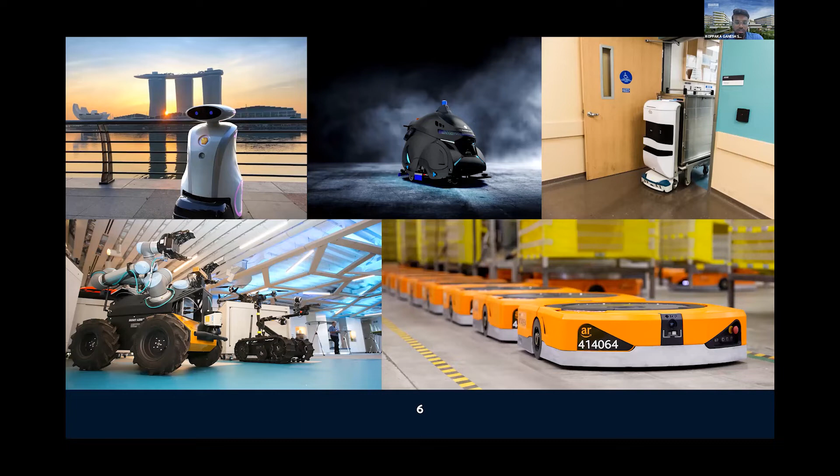When everyone started to face the heat of lockdown, robots came into play. They kept people safe, the first responders safe, and adoption of these robots really opened up doors in terms of research and applications, among others. So here are some of the robots you might have actually seen in the commercial market. The robotic community spans across multiple domains - be it cleaning, maintenance, logistics, surveillance, etc. There is huge potential coming up.

Many big multinational companies or even small startups all embrace robotics as a final end solution. The good thing is that all the robotic solutions coming up are being embraced as potential scalable commercial solutions. As part of this, we have a few projects I was involved in - the first is Project Ermine. As part of this project, we developed several robots - this is the fundamental research we were doing here. We anchored our research onto several platforms, and these platforms helped us innovate even more things. I'll quickly take you through some of the platforms we have today.

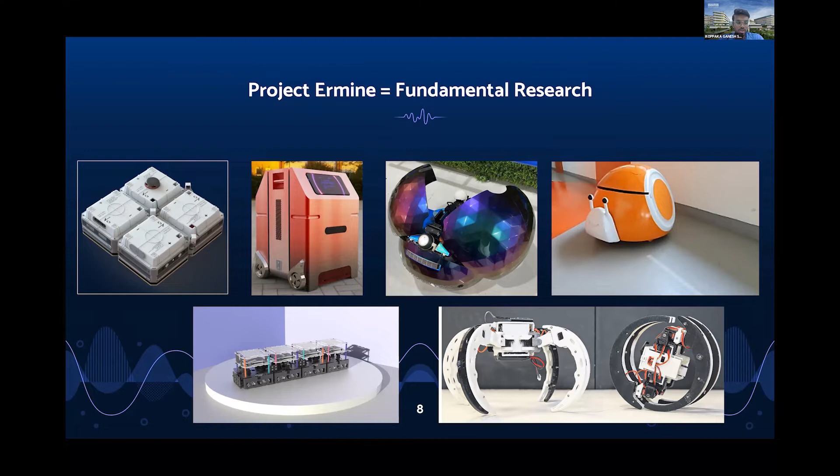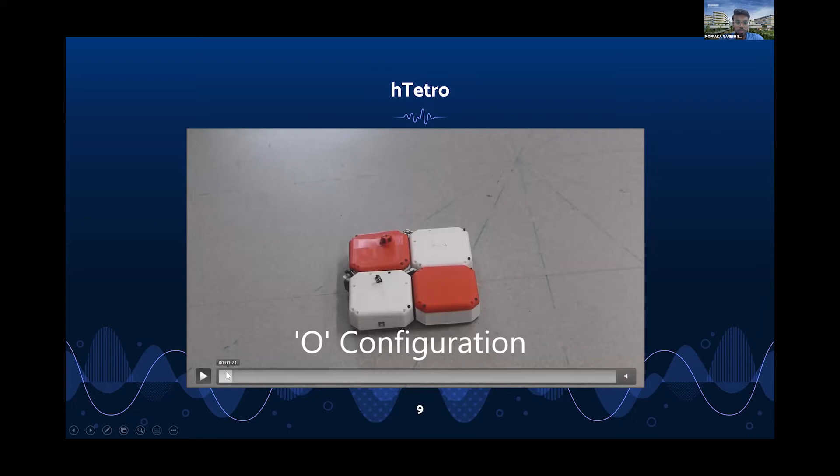hTetro is one of our flagship robots. There are commercial cleaning companies who claim to have sold more than 1 million units, proudly saying their robot can clean different areas within a house. But the problem with those robots is they all come with fixed morphology, meaning fixed shape. They cannot change shape. So what happens with such a robot? Here we are addressing that problem, which I will show later.

We have drawn inspiration from the classic game Tetris. We all grew up playing that game, so the research inspiration was driven from it. We have built a robot that can change into 7 different shapes. In the current video, the robot you see is a commercially available cleaning robot in a typical office setting, and as you can see, this robot cannot reach tight spaces.

What is the immediate and major contribution a cleaning robot can make? Cover as much area as possible. But at this preliminary requisite, this robot is failing. How do we address this problem? Here we have deployed our hTetro, a Tetris-inspired self-reconfigurable robot. It can change shape to go into tight spaces and clean efficiently.

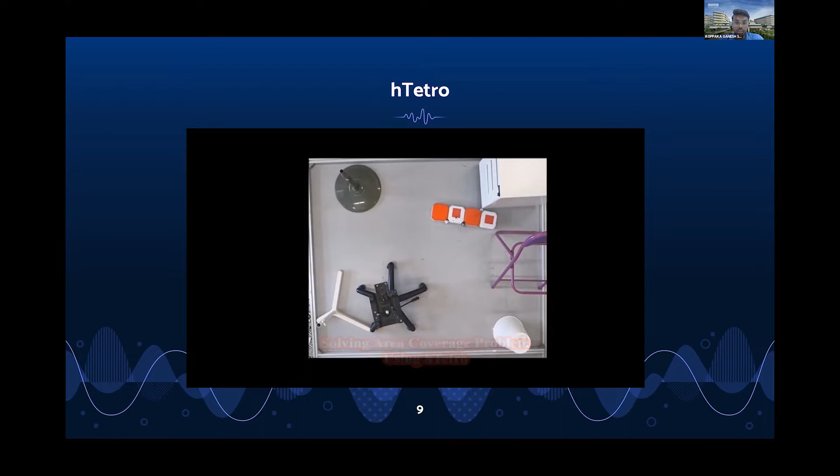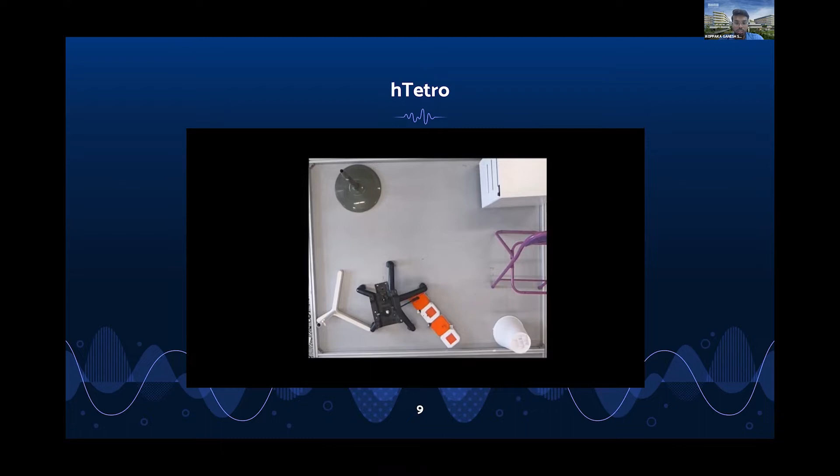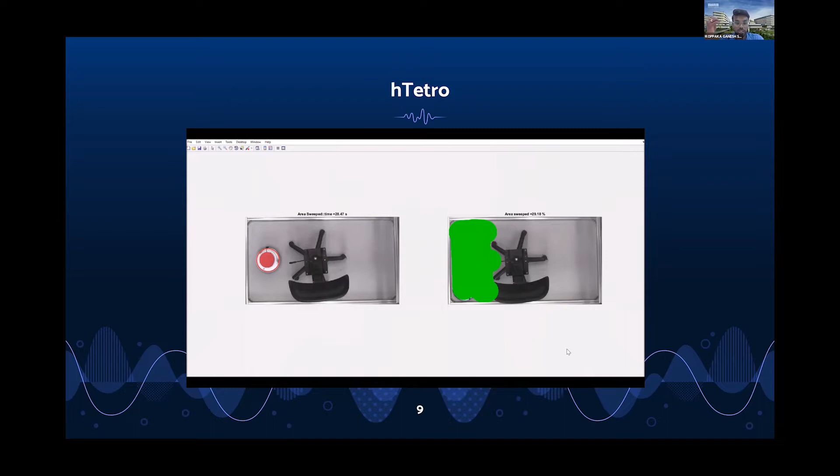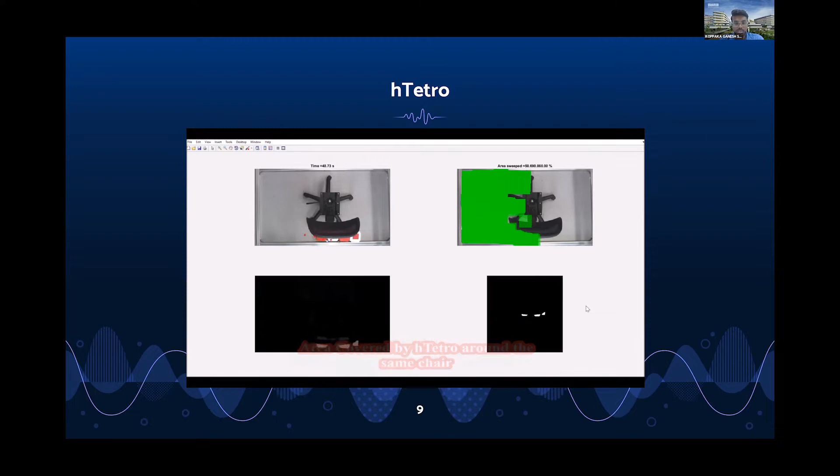We have also performed several experiments on this robot to assess area coverage and plan different paths more efficiently. Here is a quick glimpse of how the robot covers an area. The green color is the area covered by the robot. As you can see, the robot cannot move from one side of the chair to the other side, which is typically observed with commercially available cleaning robots of fixed morphology. But here comes our robot, which can seamlessly change shape to move from one side of the chair to the other, enabling 100% area coverage.

This is something we are currently working on, and several research papers have been published in top tier journals proving the capability and efficiency of this platform. From an engineering point of view, it is quite important and complicated to plan the path so the robot knows how to go from one area to another without compromising area coverage efficiency.

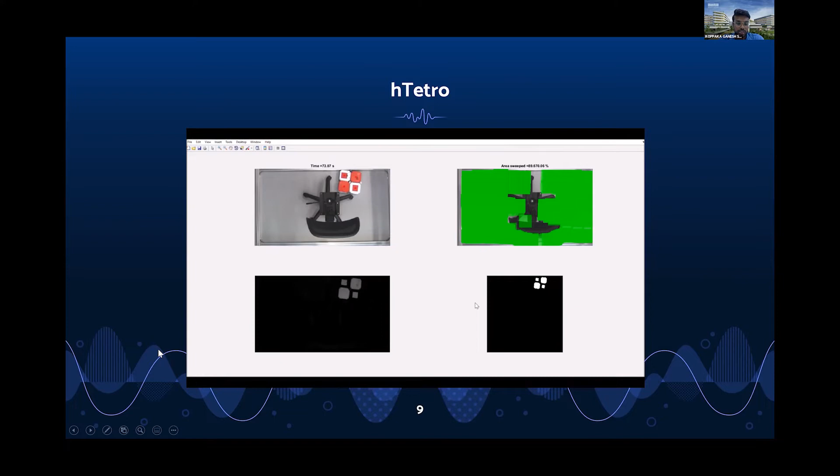So this robot is also currently being tested at several food courts, and we are looking towards further deploying it in a few other places.

Usually there is this claim that cleaning robot companies make, where they say, we have embedded a lot of sensors and intelligence into the robot to make sure it can detect stairs and prevent itself from falling off. Technically, wow, it sounds super good. But who cleans the stairs? That's where we took that opportunity.

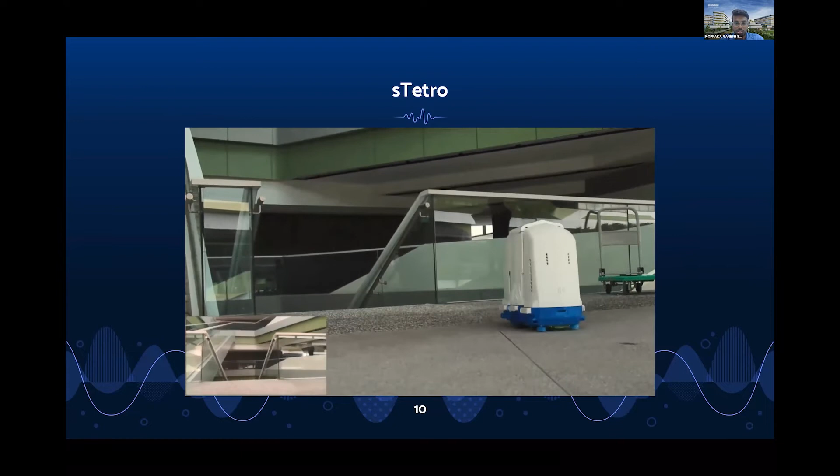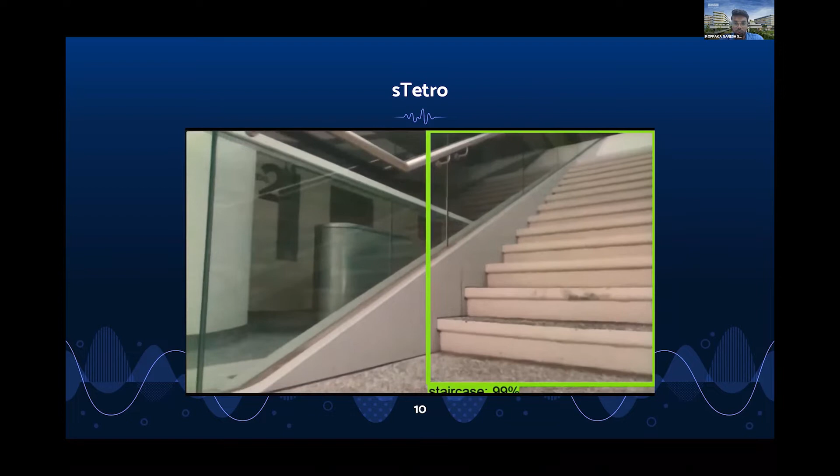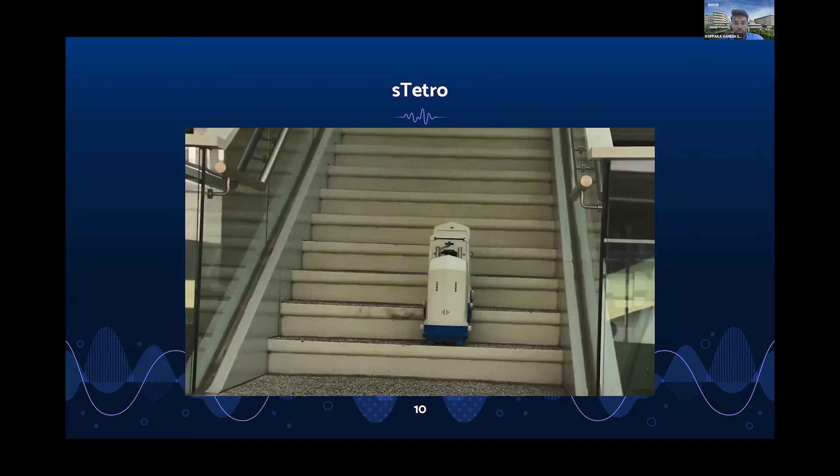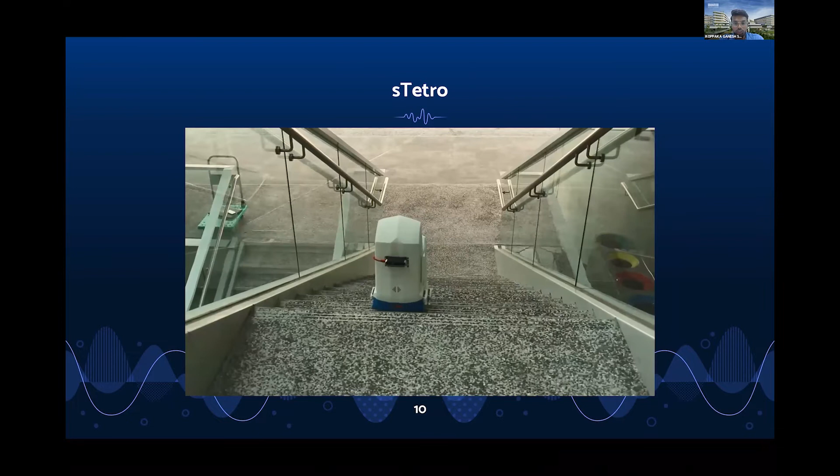Similarly, several research journals have been published on this technology, and research is still ongoing in terms of improving safety, detecting more complex staircases, and planning the path in the 3D plane.

We have not just limited ourselves to the floor and staircases, but also went an extra mile on something else: a glass facade cleaning robot. Why is a glass facade cleaning robot important? Because building owners and facility managers are adopting glass facade designs more and more often, and this opens up a huge laborious task for humans to go up and clean every time, which also poses serious safety hazards if proper safety measures are not taken.

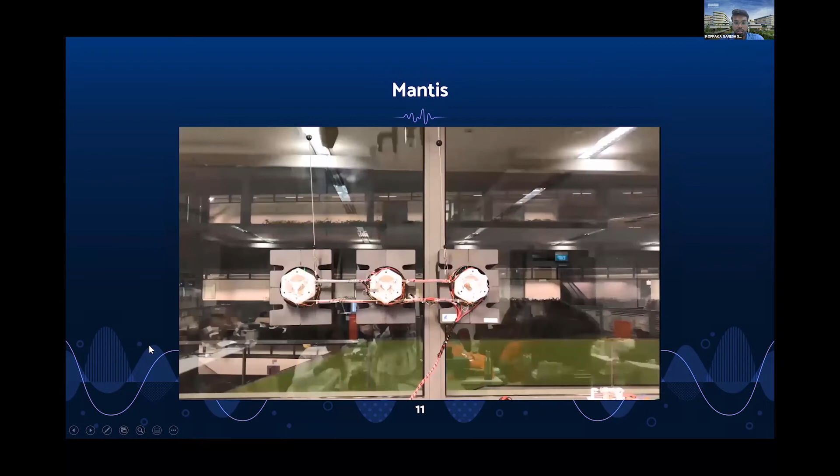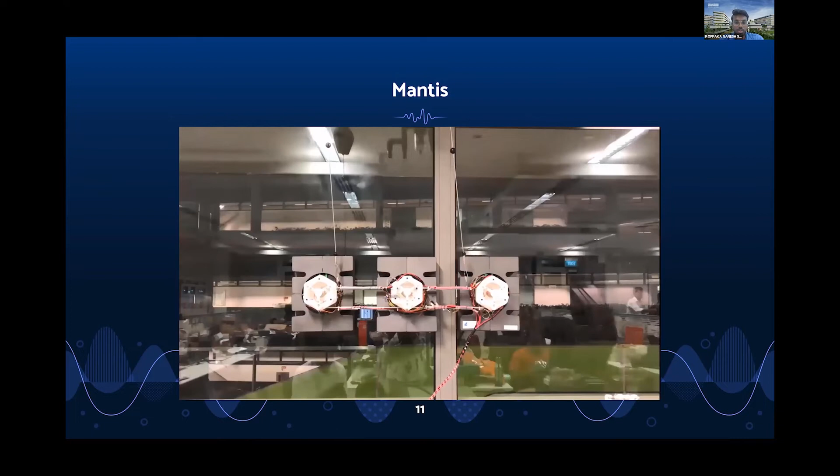In this regard, we have developed a reconfigurable robot that can seamlessly clean glass panels. You might have seen other robots in the market that can clean a glass panel, but those robots have a limitation of moving from one glass panel to another.

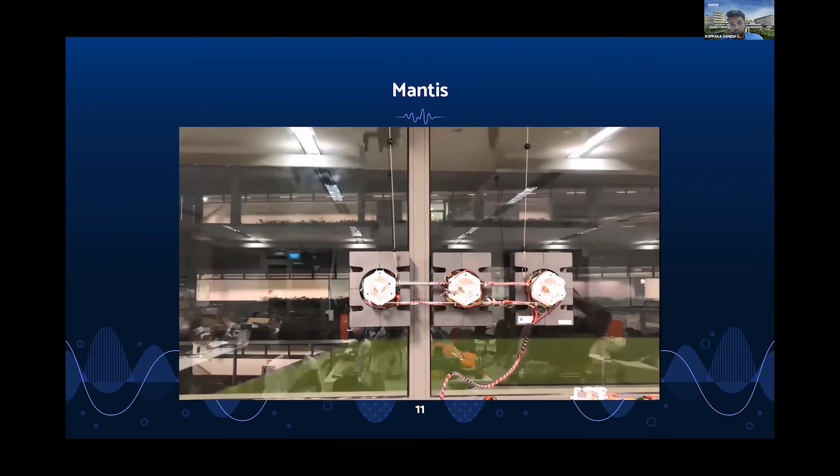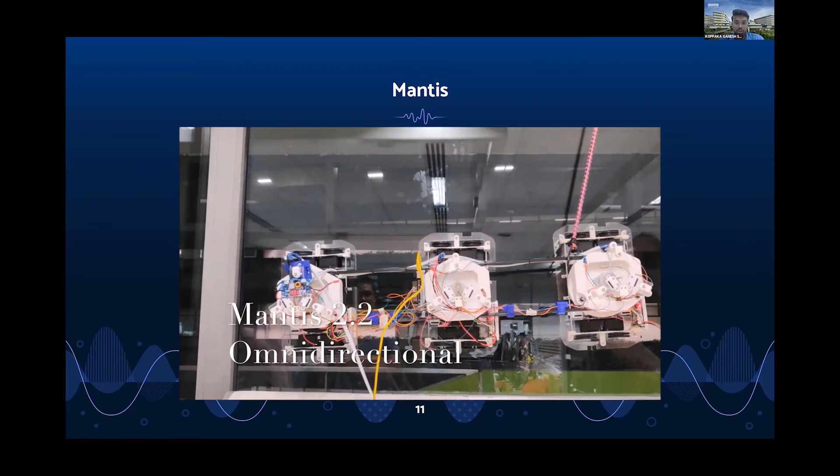The robot leverages self-reconfigurable principles to seamlessly shift from one glass panel to another. We use an active impeller mechanism to create enough suction power for the robot to stand on vertical surfaces and move. Is it just the cleaning that we do?

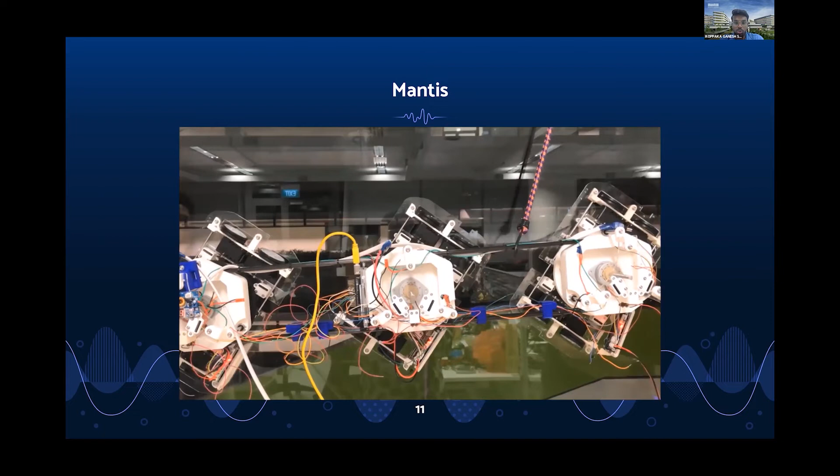No, it is not just the cleaning we do. Because the platform is quite strong and stable, we also embed AI capabilities into it. People might wonder how AI capabilities come into this, but we are looking at more than just cleaning.

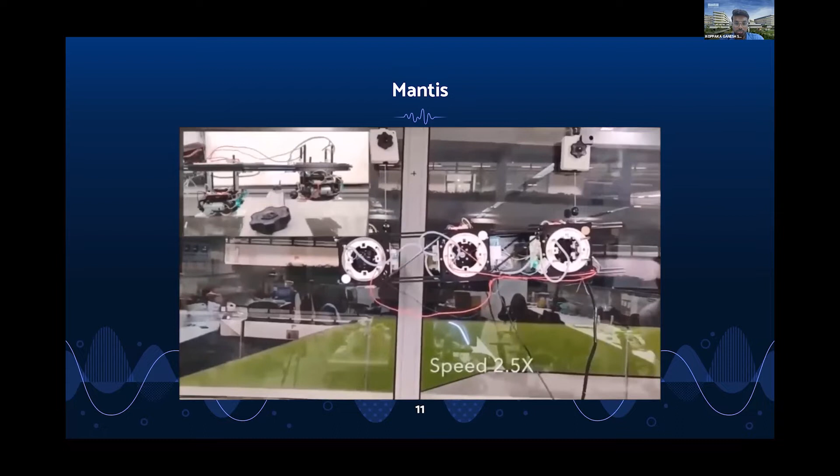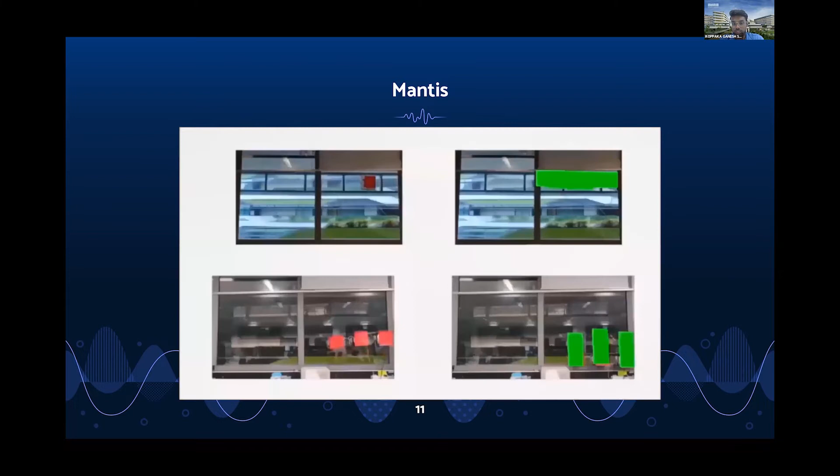For example, let's say a cleaner cleaning the glass panels suddenly observes a defect, a crack in the glass. Will he just leave it, clean and go? No, he goes and reports or inspects further. The same analogy has been used here.

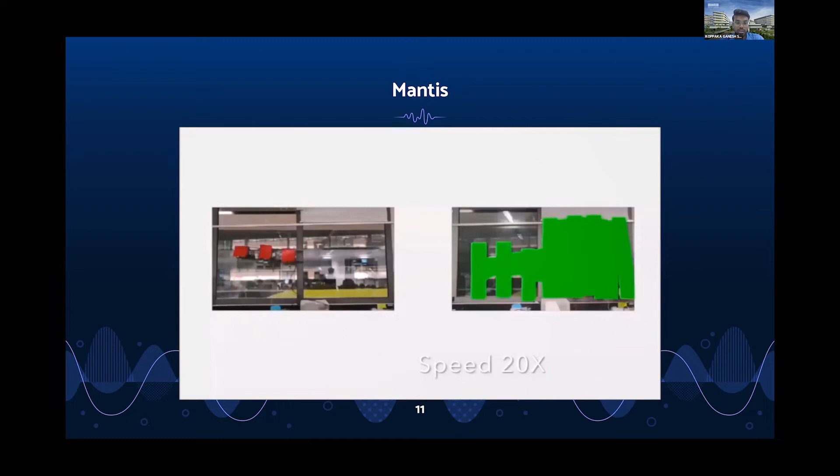The robot not just cleans, but also looks for further defects such as cracks in the glass, using trained deep learning models, and can report to the robot supervisor accordingly. So it is not just facade cleaning we have done, but we have also leveraged this technology further.

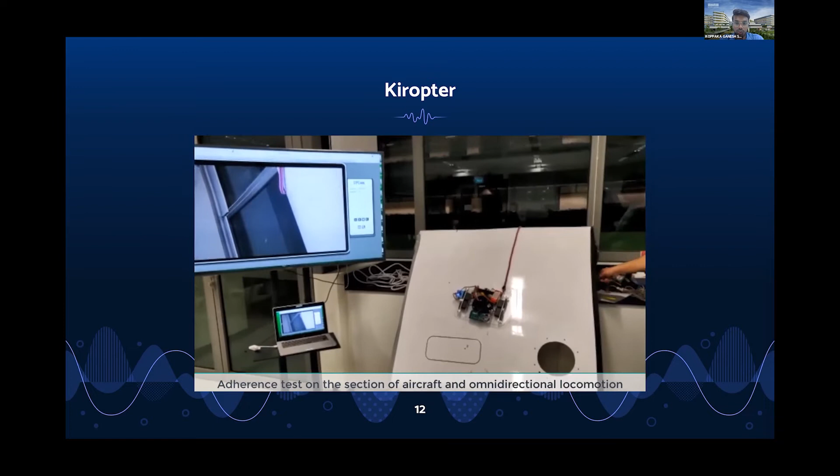We've applied this in the aircraft maintenance domain, for a similar reason. The hull of the aircraft has to be tested or inspected frequently, and that is how the technology developed for the glass facade has been leveraged for aircraft inspection applications.

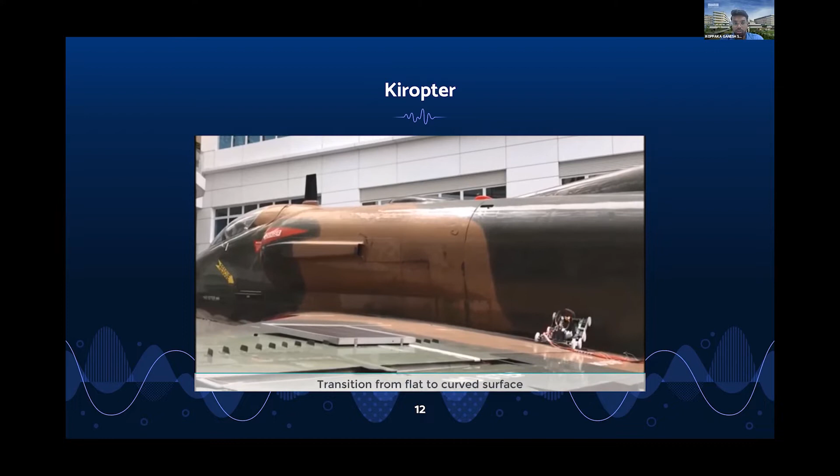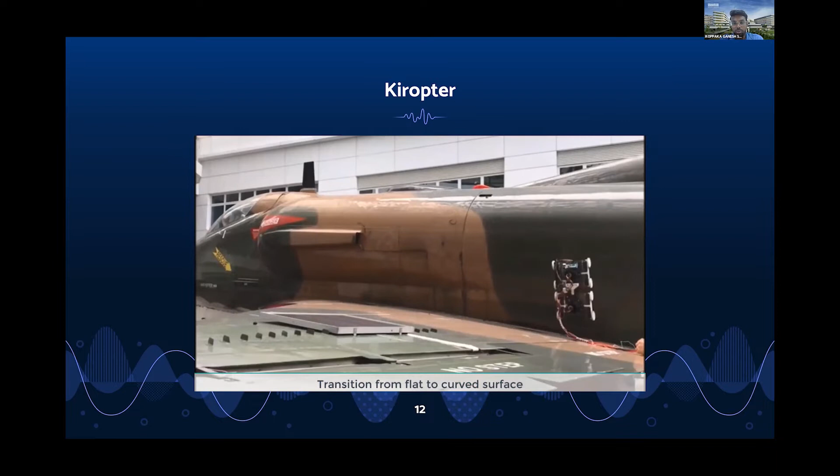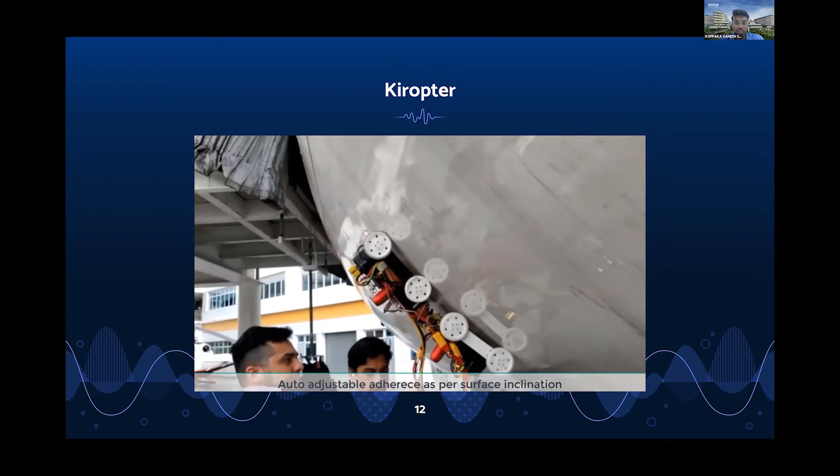One key requirement is that the robot needs to transition automatically and seamlessly from the wing to the hull. So the control and planning algorithms and the mechanical integrity of the robot have been seriously tested and successfully delivered to the corresponding industry partner.

This has also been tested on a real aeroplane, and we have used deep learning models to detect different types of defects on the aircraft, then report the same to the robot supervisor.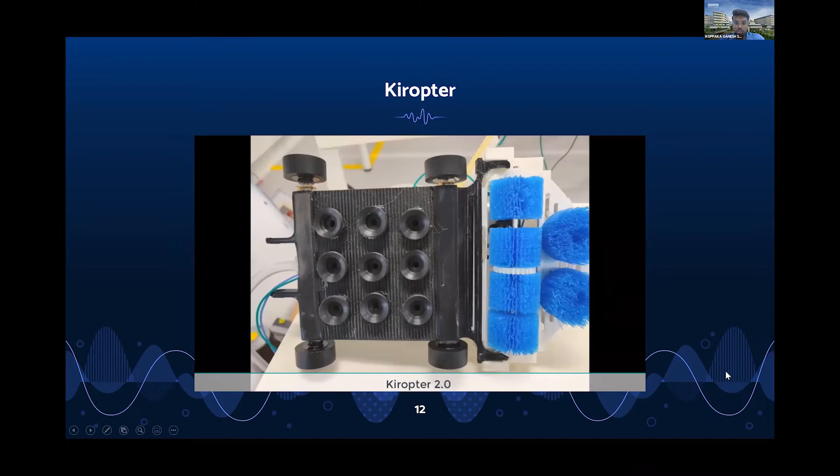The next one is another cleaning robot called Panthera. Panthera is very interesting because Singapore has a vast network of pavements, and it is laborious to clean and maintain them on a constant basis.

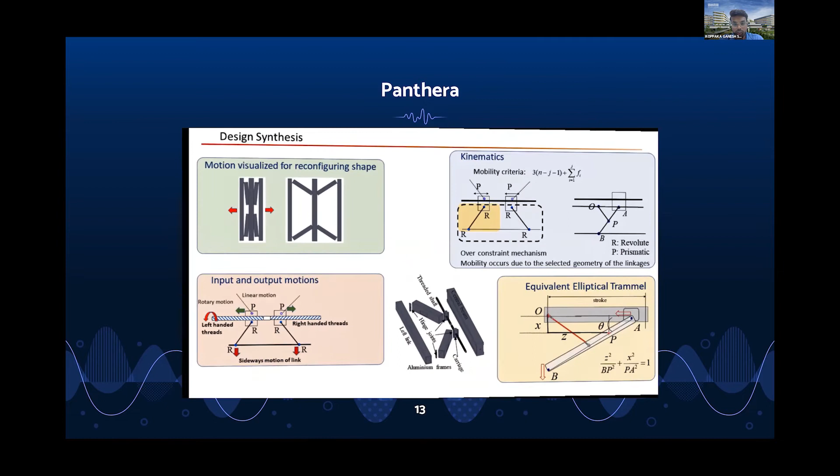What makes it different from existing pavement sweeping robots and machines is that this robot can shrink or expand its size based on obstacles. For example, if a pedestrian is walking nearby, the robot can compress and expand itself according to the pedestrian's movement.

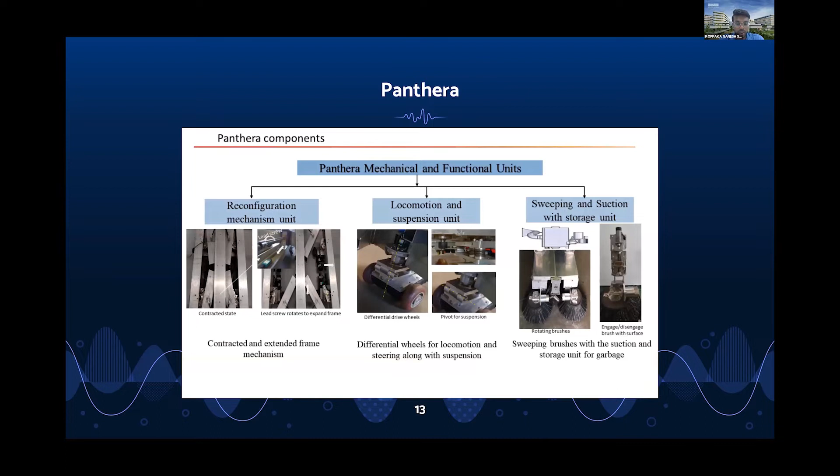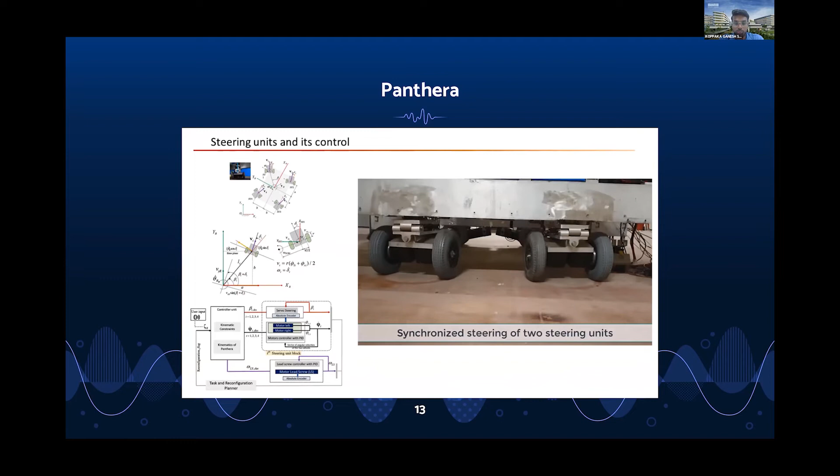The engineers and researchers worked on building control algorithms and mechanical structure designs, further adapted to provide a proper autonomous navigation stack. Even if there is an obstacle, the wheels adjust themselves based on an active feedback loop, and they perform navigation seamlessly.

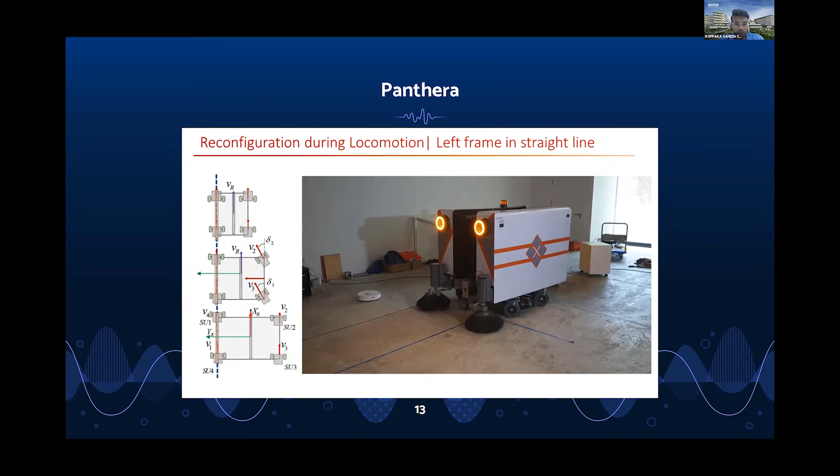This is a small video showing the compression and expansion capability of the robot. Currently we are moving towards another version. This robot is holonomic, meaning it need not change orientation but can move on the plane without changing its orientation.

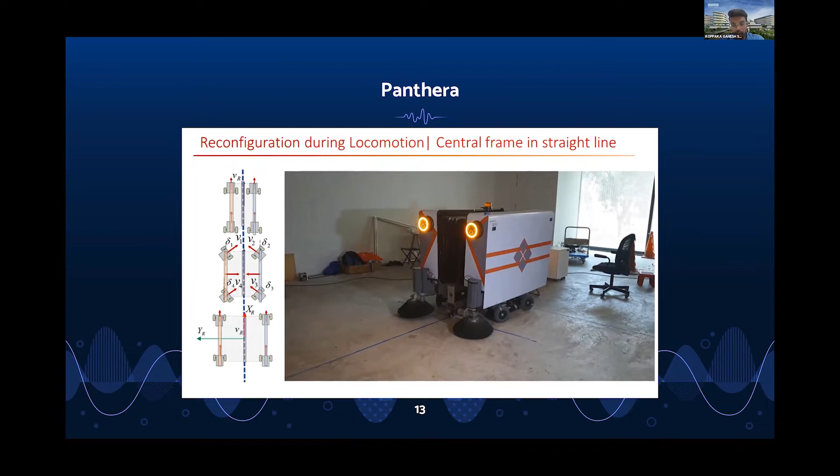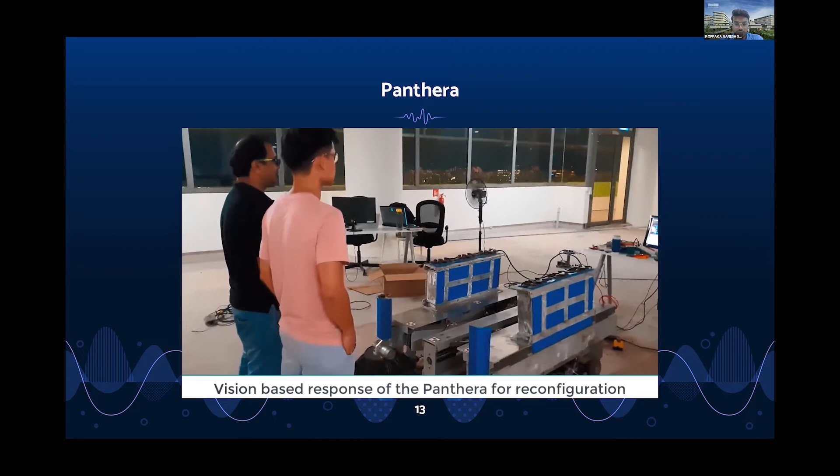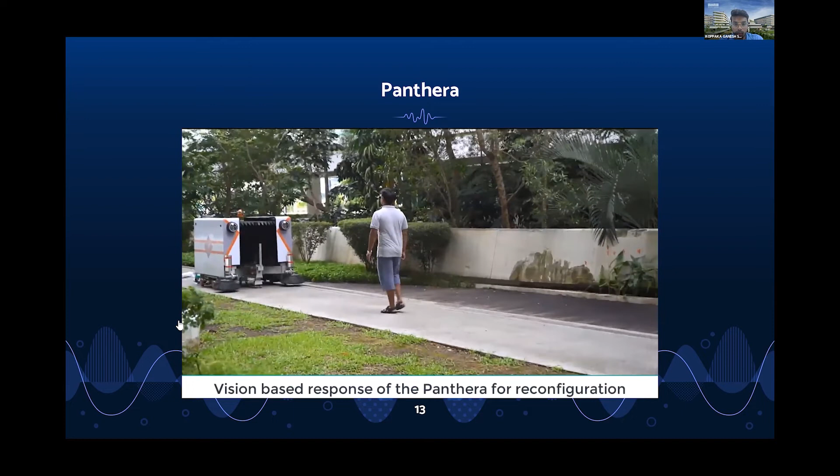We have also used high range sensors like 3D LiDARs, embedded with other sensors like IMU, to fuse this data for a proper stable navigation stack. Deep learning models have also been generated to detect a person and compress accordingly.

Next comes Scorpio. Scorpio is quite interesting because the robot has been inspired from a specific species of spider that can roll, crawl, and climb.

The major purpose of developing this class of robots is urban reconnaissance. This was developed as part of a project awarded by the Department of Defense in Singapore, and a key requirement is that the robot must be deployed and stay in a given place on a single charge, running for almost 25 days without replenishing.

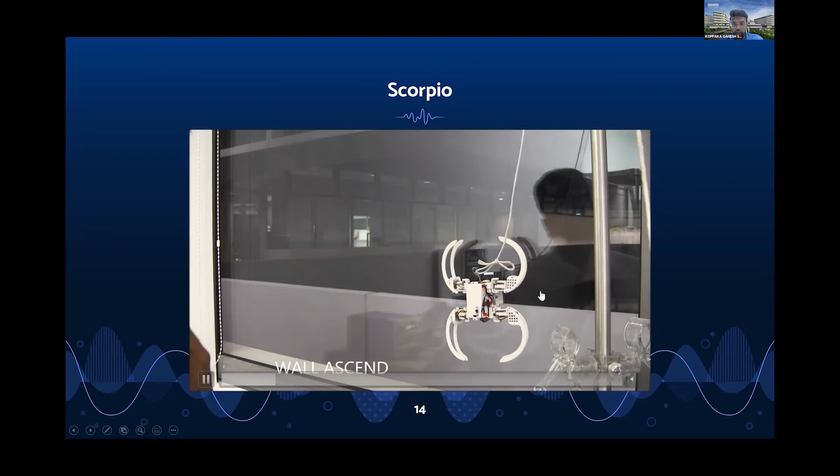The major idea is for it to crawl, roll, and climb by changing shape. Here is a quick example of how the robot can climb glass panels.

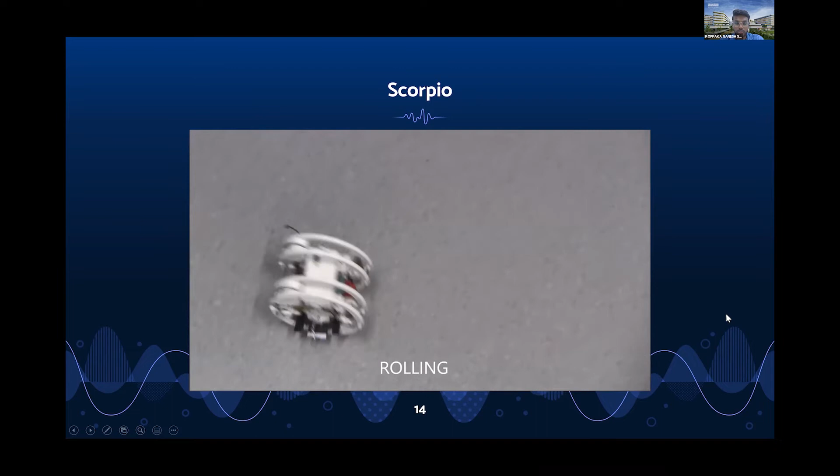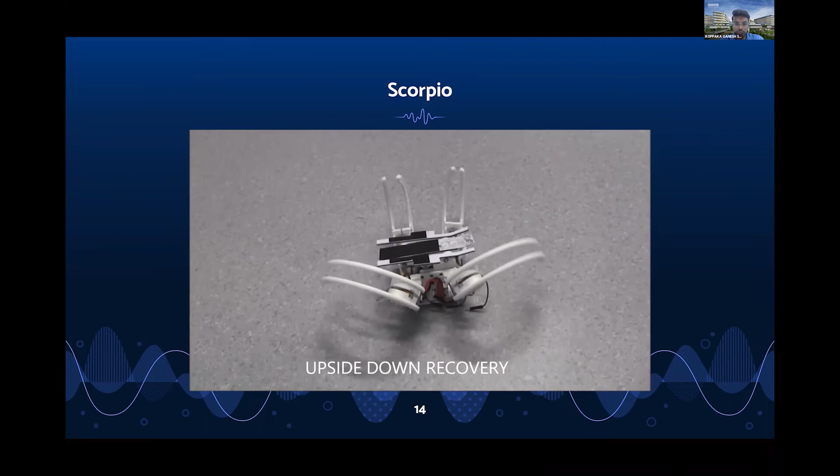This can be used when the robot needs to climb over buildings, and also the robot can change shape to roll quickly, and also it can crawl to minimize and reduce the attention from the people around it. It also has a lot of error recoveries, and the behavior has been further fine-tuned over long-term deployments.

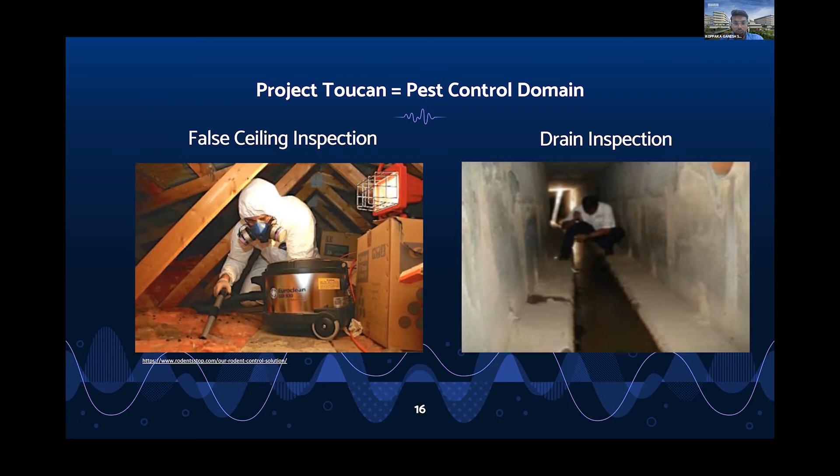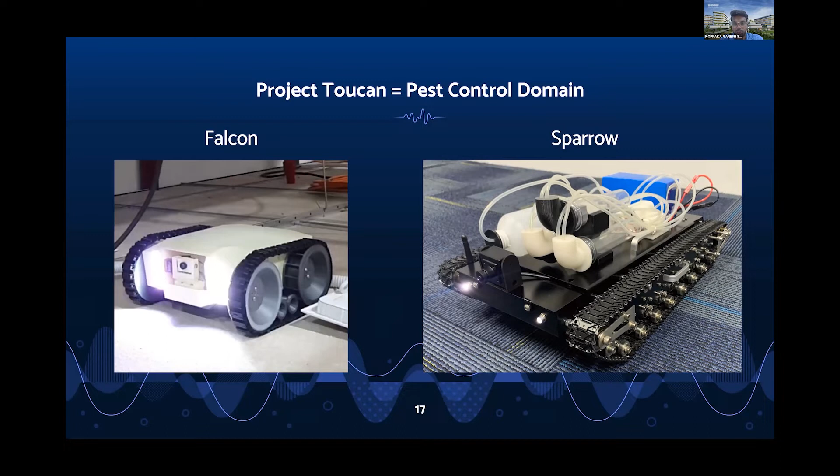We have come up with solutions in terms of robots being deployed: Falcon and Sparrow. Falcon is a false ceiling inspection robot, while Sparrow is a drain inspection robot. They leverage the self-reconfigurable principles developed in Project Ermine as part of the fundamental research.

First is Falcon - it's not the Marvel character, it's our false ceiling inspection robot. As you know, false ceilings are quite tight spaces, so it's very important to focus on size without compromising functionality.

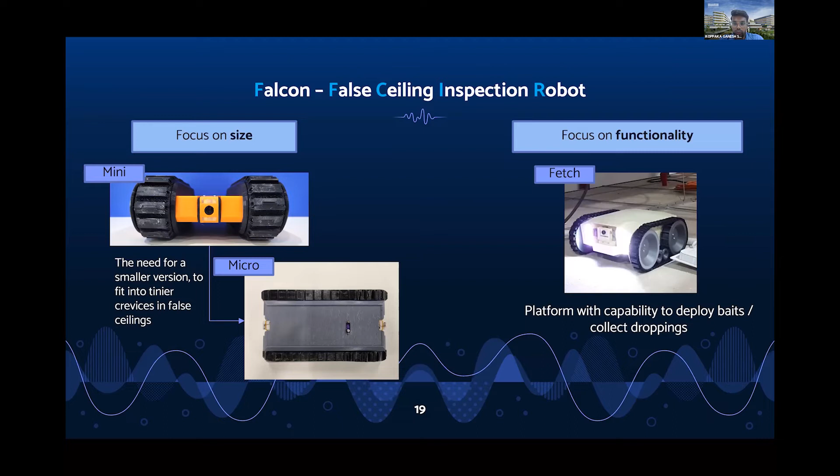So we developed several versions of Falcon that look at different types of ceilings and address different problems. We developed Micro, for tighter spaces. We recently deployed this robot on one of the ships under the Singapore Navy to inspect their false ceilings. It's not just inspection - the robot also has the capability to transmit video images from the onboard camera.

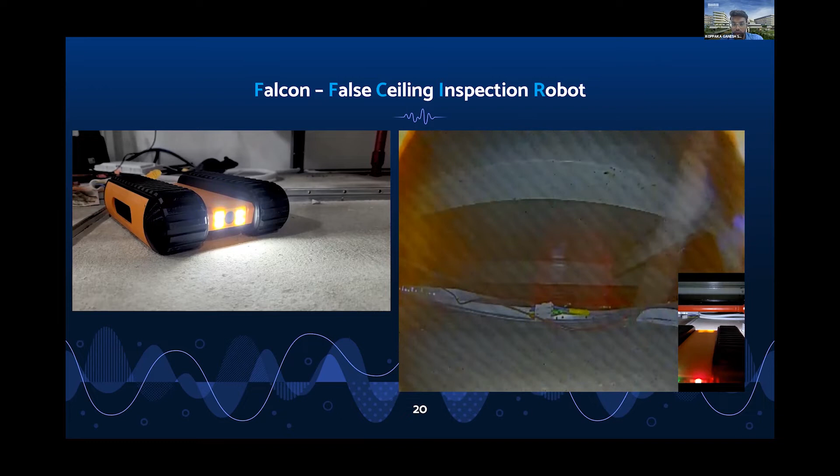We use low-power computing systems to transmit the image data. This is a quick example of false ceiling inspection within one of the test areas. As you can see, it's a tight space where humans cannot easily go in. So robots help human operators further identify where the problem is and the structural integrity within the false ceiling.

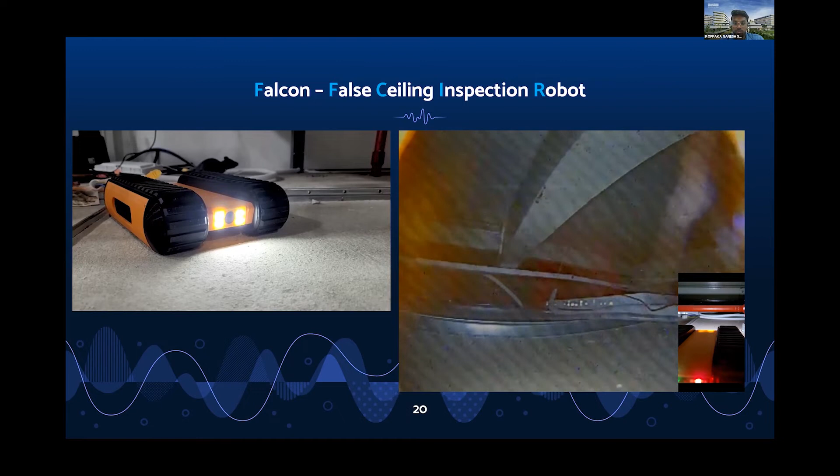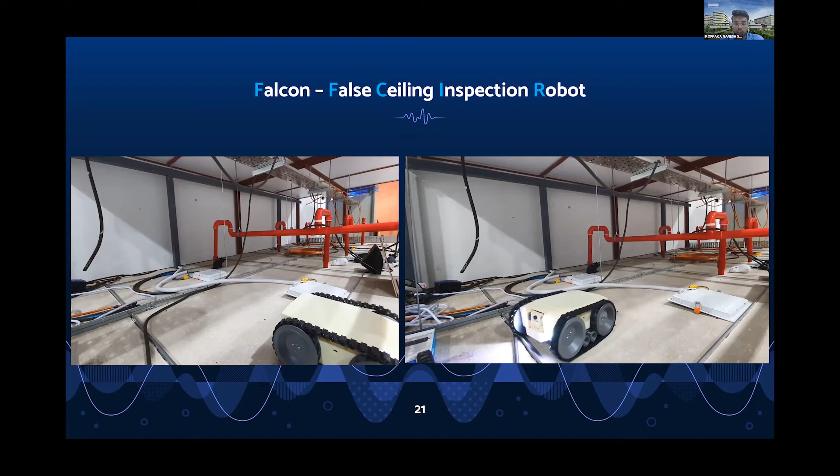The next one is Falcon. It's quite important because it's not just inspection, it also shows what we do after inspection. As you see in the video on the left, some beans have been used to replicate rodent droppings, and the robot easily goes and fetches all the rodent droppings. The second function is dispensing the bait - it not only collects rodent droppings but also dispenses bait. Since the user cannot go to the false ceiling because of tight space, the robot can carry the pesticide or rodenticide to the point of interest, and at just the click of a button, dispense it.

So as you've seen - then comes a question: how do you know the point of interest? If I start walking in a huge shopping mall, I sometimes lose my way. So how do I get to know where my robot is within the false ceiling?

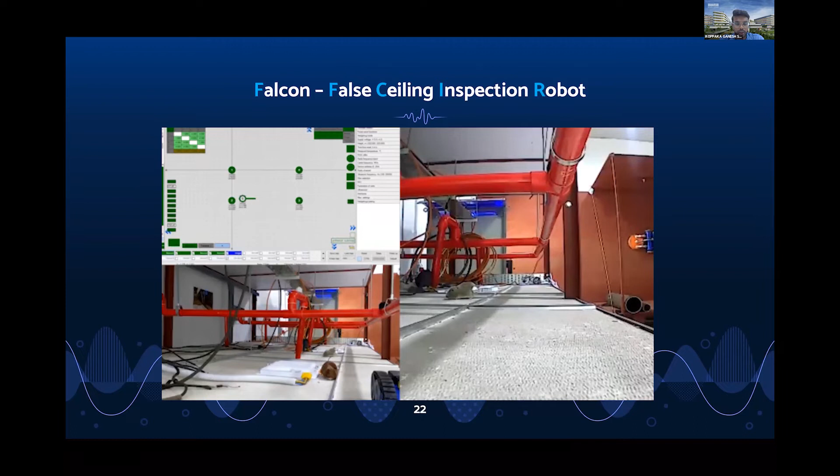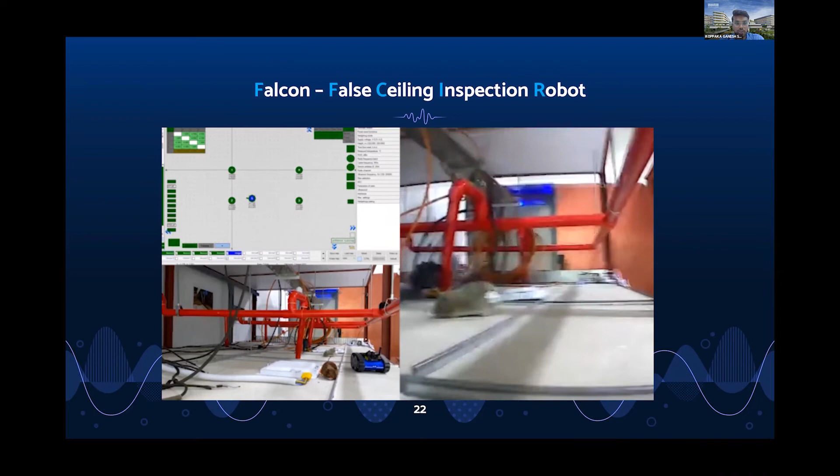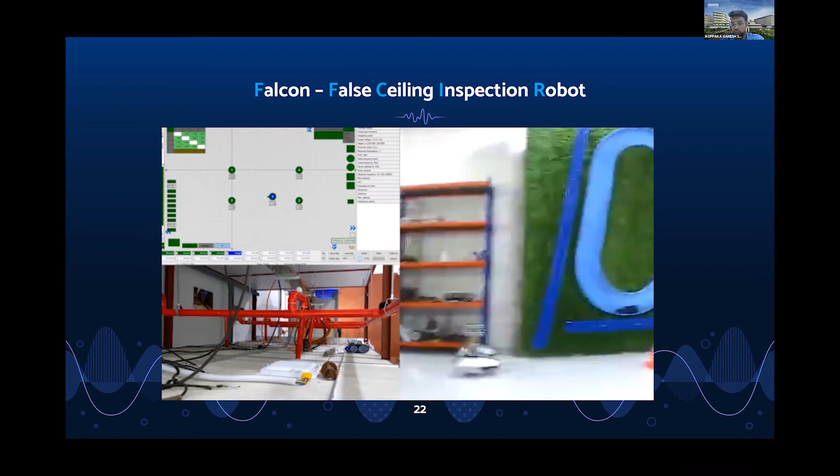That's where we developed a positioning system where the robot can be easily identified within the false ceiling. As the robot moves, as shown in the video in the top left corner, its position is displayed in real time, which helps the navigator control it precisely. If the robot gets stuck somewhere, the operator can climb up and open one of the false ceiling boards to retrieve it exactly, instead of searching the whole false ceiling. This has been tested at a test bed site that mimics a mock false ceiling.

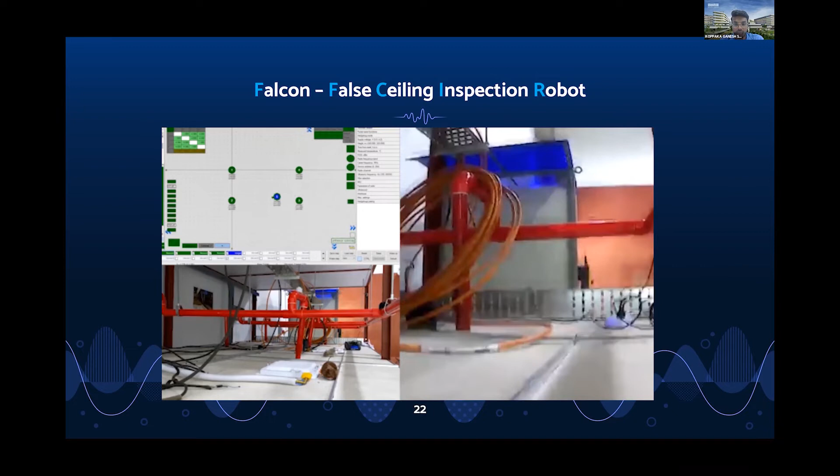So it's not just that we inspect, detect, and deploy the pesticide and come back, but we also look at other leveraged applications. Let's say there is a wall within the false ceiling that has a structural defect, or there is a pipe causing water leakage, or there is degradation of the electrical wires. So the robot not only looks for rodents and other pests, but it also looks at structural defects or other building management issues.

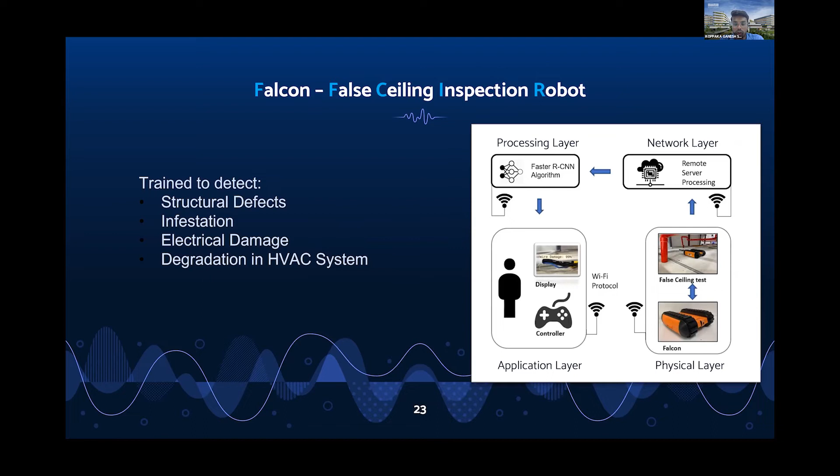So we have developed several deep learning models to detect these types of structural defects. One interesting thing is that the robot also detects the type of rodent. We trained it using a mock rodent, so the model can detect the rodent if it walks past the robot.

So the robot can also be deployed overnight. It can stay there for more than 12 hours on a single charge, but can get woken up by any movement. If a rodent passes by, the robot wakes up and takes a picture to show the supervisor when he or she returns to work.

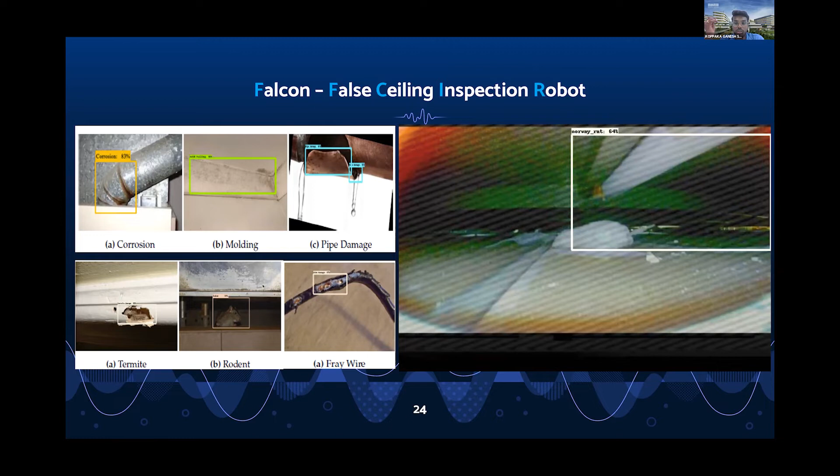It's not just that we design the robot, we also look at user experience. As a researcher, it needs to be a comprehensive and holistic view of what we are doing. So we have improved the packaging so that people can carry it easily, addressing the ergonomics problem.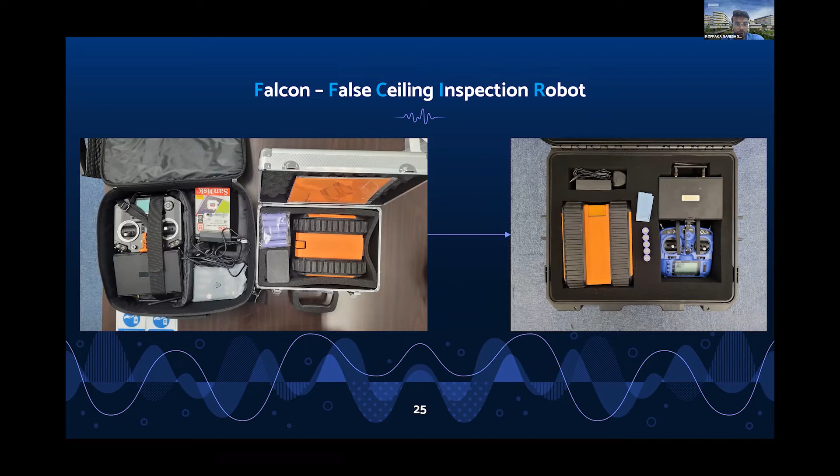Then next comes our drain inspection robot. It is usually deployed in drains for a few applications: one, to inspect the structural integrity of the drains; two, to collect water samples; three, to deploy pesticides.

As you see here, the robot uses a reconfigurable principle so it can be manually reconfigured to change its shape in terms of width, to fit different types of drains. It's also easy for a robot operator to change the shape.

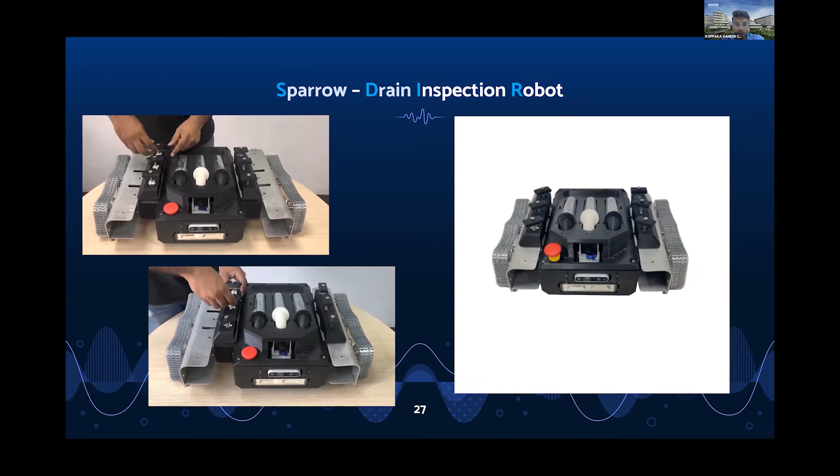We have also embedded several sensors with the potential to capture all the required information, such as cracks in the wall, collection of samples, and any tree roots protruding into the drain. It can overcome those obstacles using a specially designed mechanical drive system.

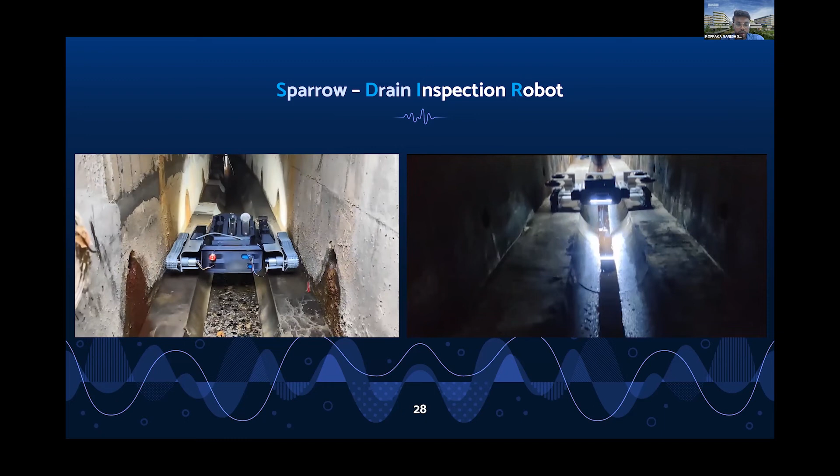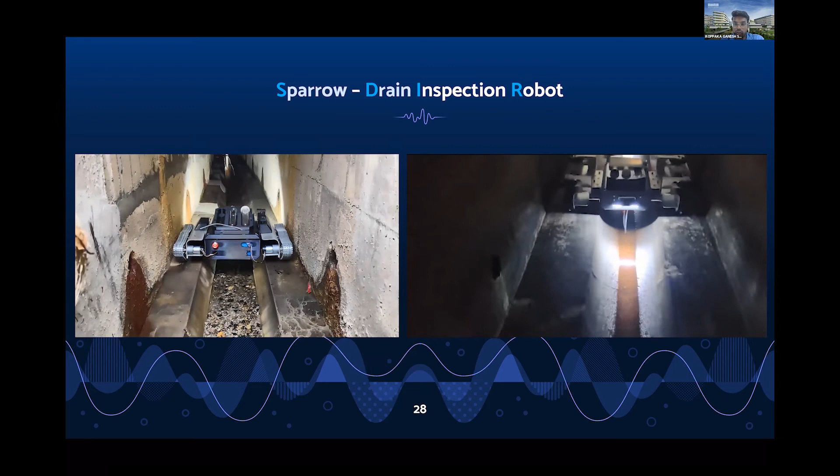Here are some videos taken during a real-life deployment in the drains. The robot goes on those side tracks and can also take turns within the drainage network. As you can see on the video on the right, there are two pipes just hanging on top of the drainage water.

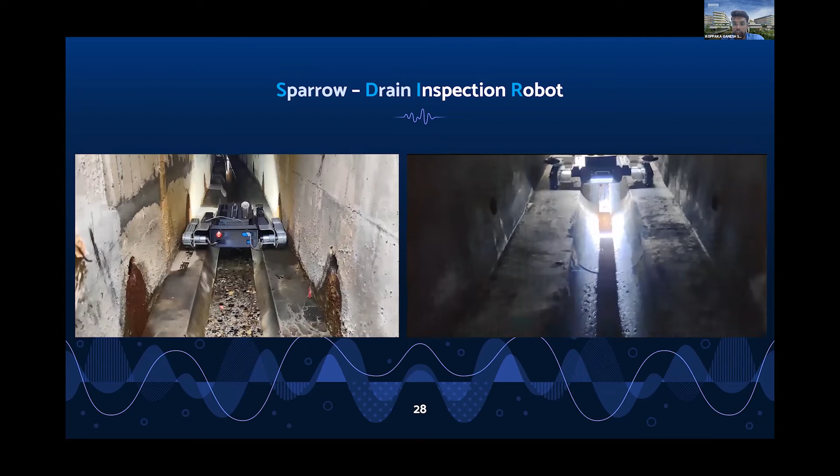It's quite interesting because these two pipes collect water samples so as to stop the breeding of mosquitoes. Whenever these samples are collected, they are sent to the lab for further processing, and then immediate action can be taken to prevent further breeding of mosquitoes.

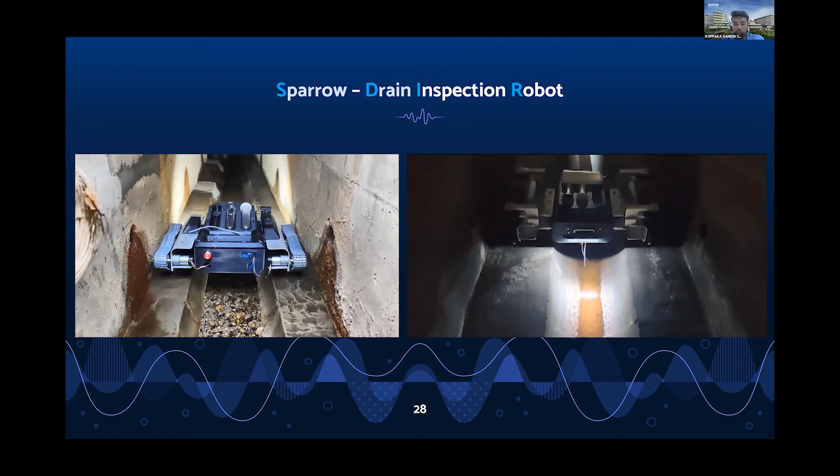It's not just that we've developed the robot, but we have also given considerable design consideration to operating it underneath the drain, where signal reception strength is quite low. Currently we are moving towards adopting other communication technologies like 5G to further propel the flexibility in operating this particular robot. So as you see, this is how the robot is being controlled.

The operator can use a joystick to turn and also to move forward or backward, and this video feed can be collected within the robot and used for further post-processing and insights.

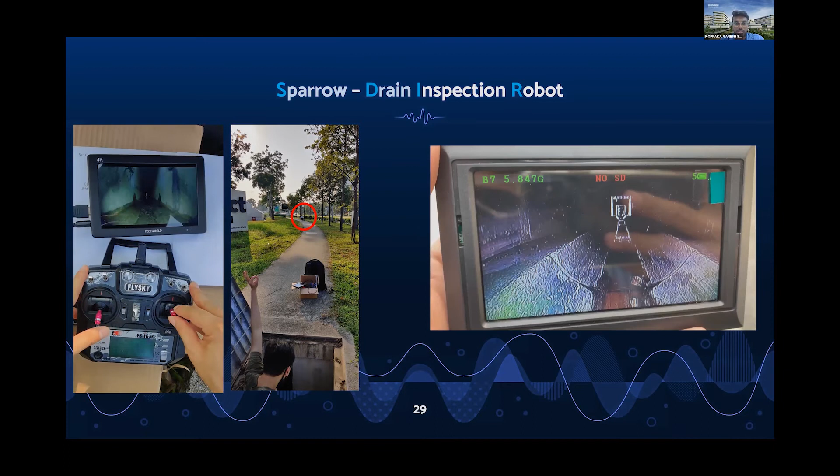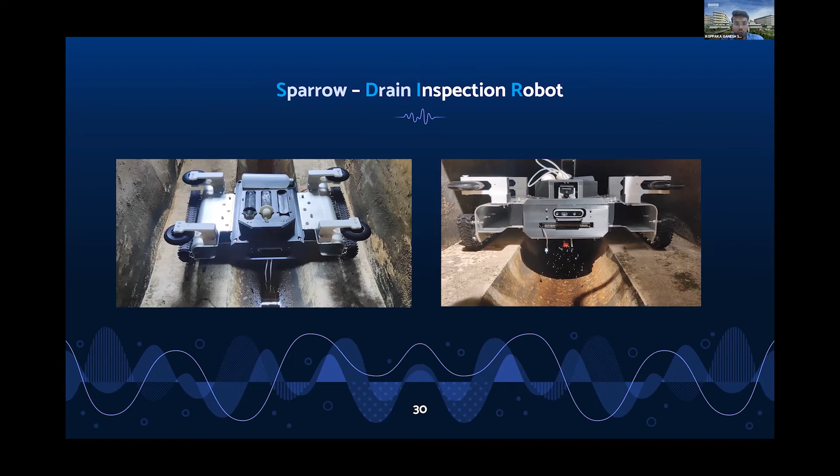So this is the overall overview of the robot, where it can both collect as well as dispense.

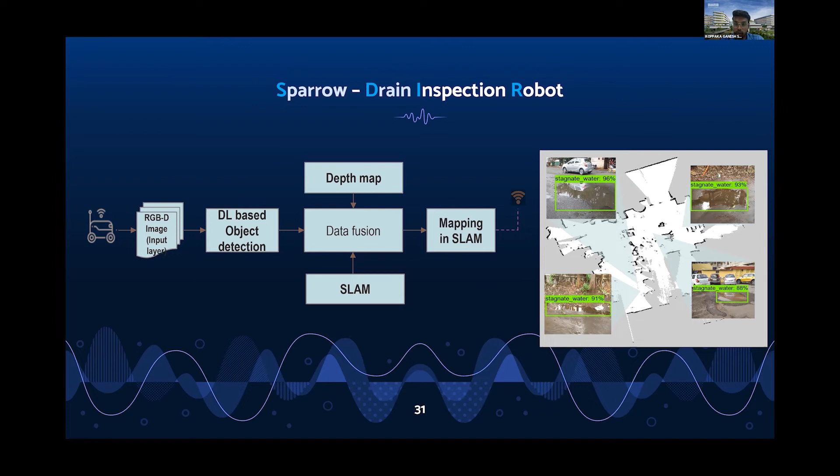We have also used data models based on deep learning neural network architectures to detect stagnated water. We need to detect stagnated water because the robot can automatically go to collect samples, since stagnant water is usually a good breeding site for mosquitoes and other pests. So it is quite important to detect the stagnant water.

Coming to this, I also wanted to tell how Amrita University has shaped my career and how it helped me. I joined the university in 2014 under the Electronics and Communication Engineering discipline, and I attended several design camps and bootstrap events in 2015.

Later I joined as a student researcher in the Humanitarian Technology Lab, and from then I started working on university funded projects, and I got considerable exposure in terms of both technical as well as managerial skills.

I also got the opportunity to publish research papers in international conferences and journals under the supervision of Professor Dr. Rajesh Kannan Megalingam. This further improved my managerial skills, because I was also part of the IEEE executive committee, and we got a chance to organize several events along with research and development.

So all these combined together helped me get admission in a dual master's degree, and I was successfully able to use those experiences to pursue my degree and graduate from there at SUTD.